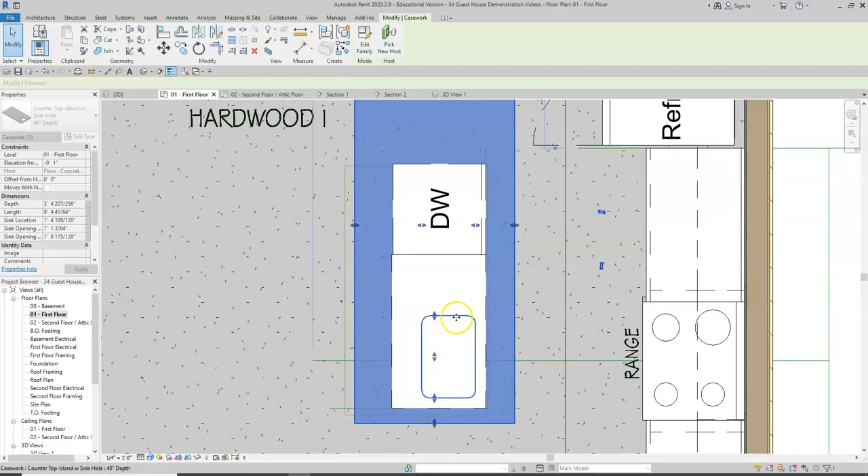Before we can know exactly how big this opening needs to be, we need to add the sink on top of the countertop. So we will locate a new component, and the sink is located here, and we have a double and a single. For the size of this home, I chose to put the single sink in.

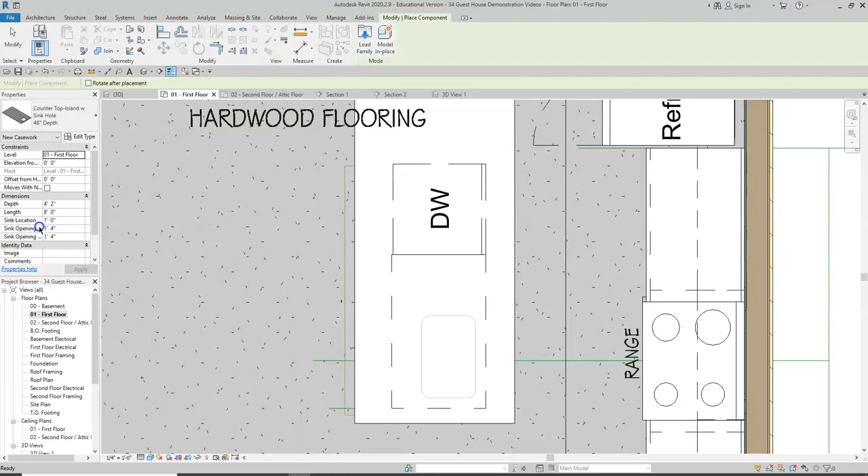We need to lock this on top of the center of the cabinet below, so we will hover around until we see that line pop up. And we will need to align the front of the sink with the dishwasher. Alright, so this is the proper location for the sink.

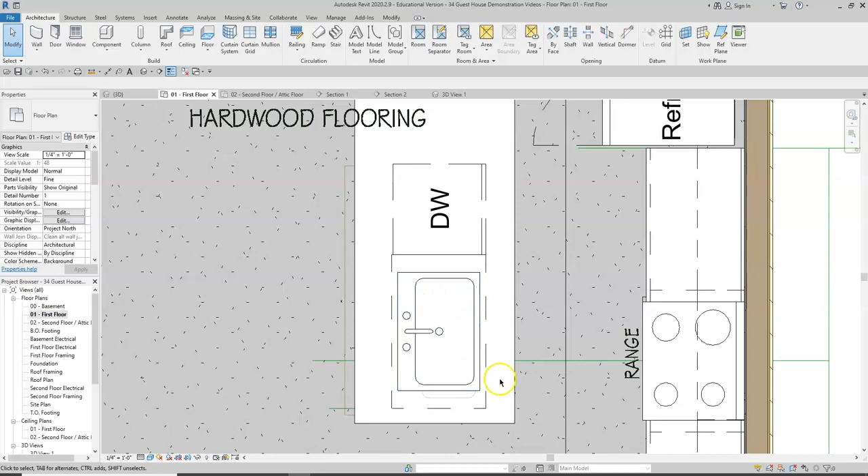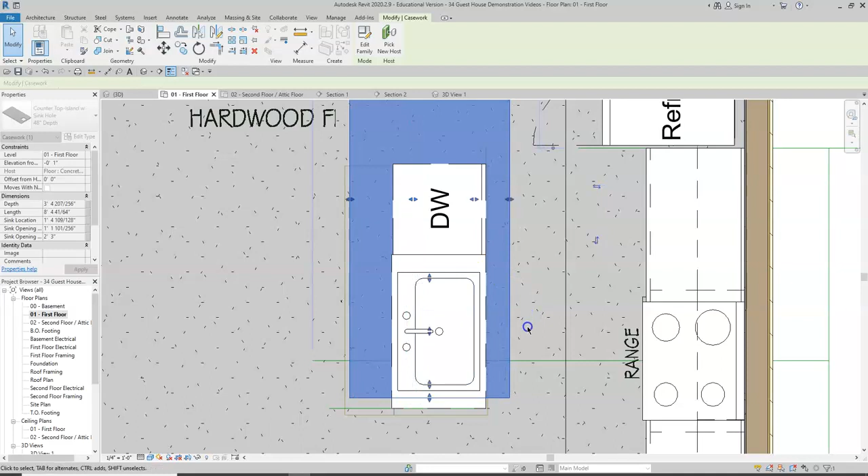And we need to align our opening with the sink itself. Once we have located the opening on all four sides, we can now manipulate the outside.

So now we are allowed to move the edge of the countertop and the front of the countertop. Had we done this in reverse, the sinkhole would be moving out of place.

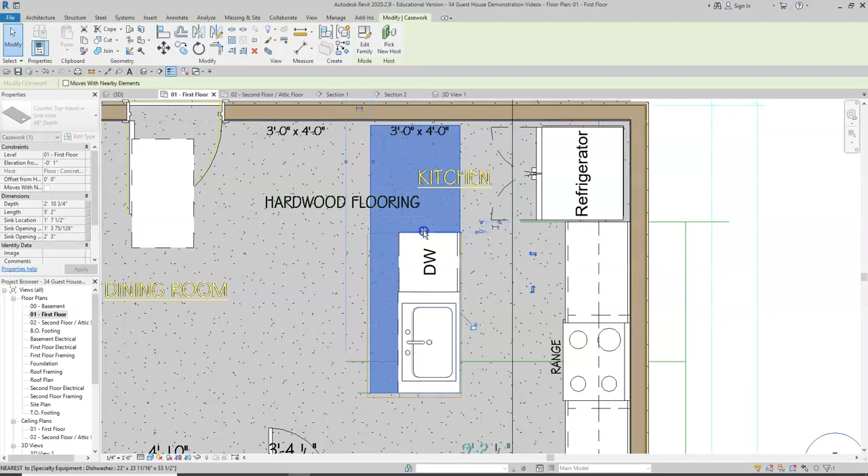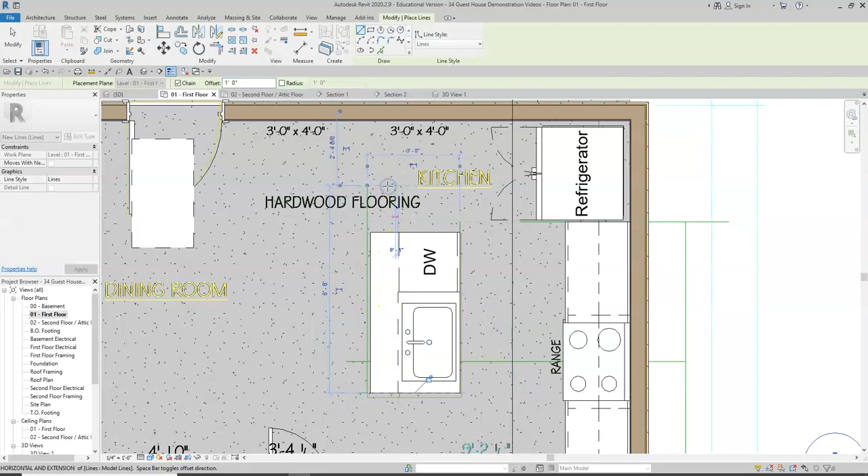Now for the overhang, which is where the bar stools would be for knee space, we will need to draw a new model line. The overhang distance is 1 foot. So we will need to find a model line, offset 1 foot, find the back of the cabinet below, and then align the countertop.

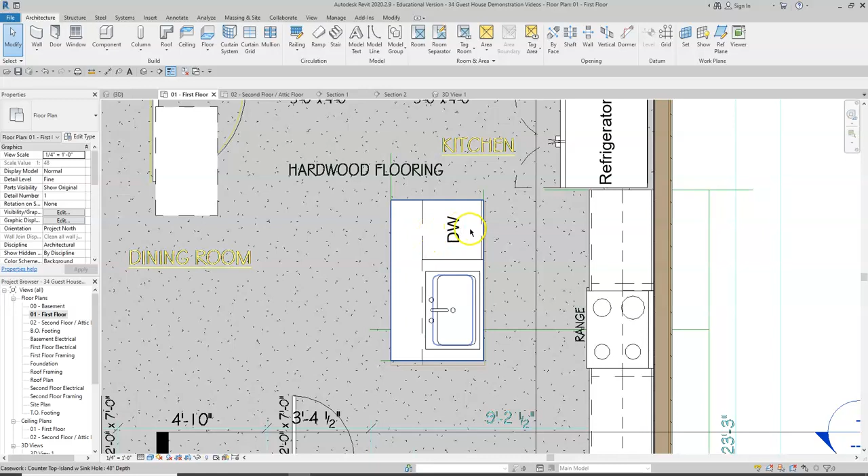So one way to cover this would be to put a stud wall here. Another way would be to put more cabinet filler in. The only issue is the cabinet filler must be hosted to a wall, and we do not have a wall here. So what we're going to do is quickly create a new wall.

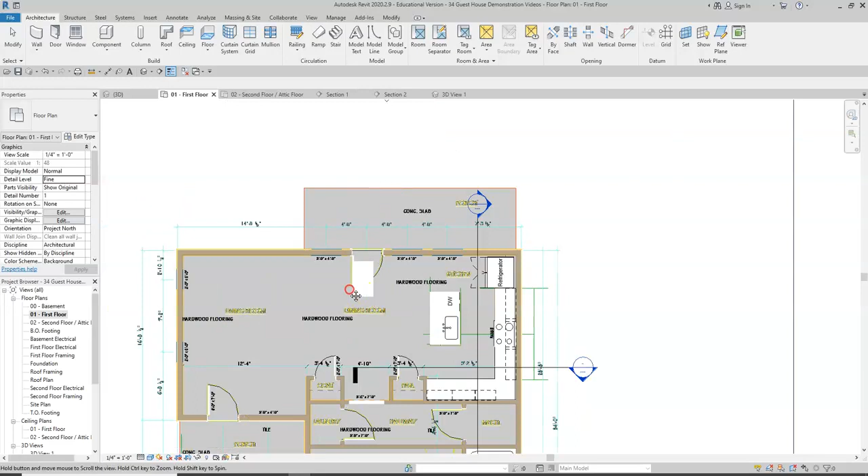I will show you how to create a new wall and have it only be 1/2 inch thick, and we will draw it around all three sides, so that our island is wrapped in the same material, which will be the same cabinet material when we assign materials in later videos.

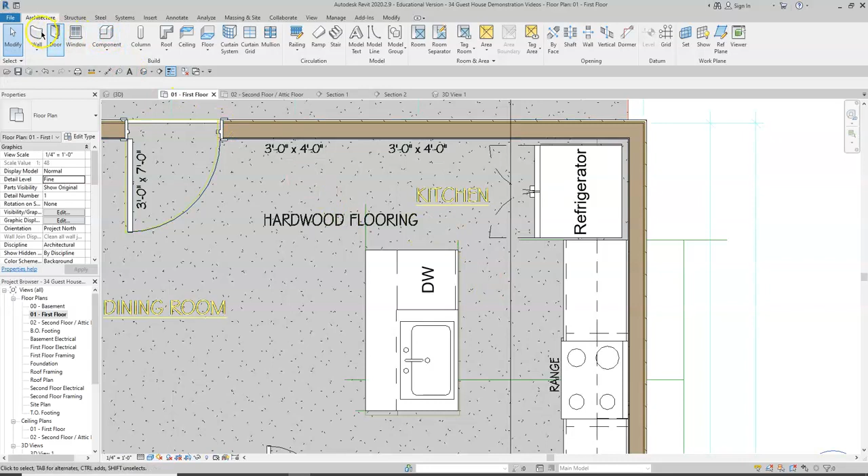Alright, so we'll click on wall, and we will start with a generic wall. We'll go 4-inch generic. And as we did for the cabinet, we are going to edit type, and we are going to duplicate. And we will name this 1/2 inch island wrap.

The structure is going to remain, the material will be unnamed at this point, and our thickness we will assign to be 1/2 of an inch. So 0 feet, 0 and 1/2 inches. Select OK, and OK once more, and now I have my 1/2 inch island wrap ready to go.

Now for the height, at this point we can just guess the height, and then we will go into our section views and exactly pin the top of the wrap to the bottom of the countertop. But for right now we're going to simply wrap the whole thing in a 4-foot tall material. So we're going to go unconnected on the top constraint, since we're not going all the way to the second floor, and we will add the height to be 4 feet unconnected.

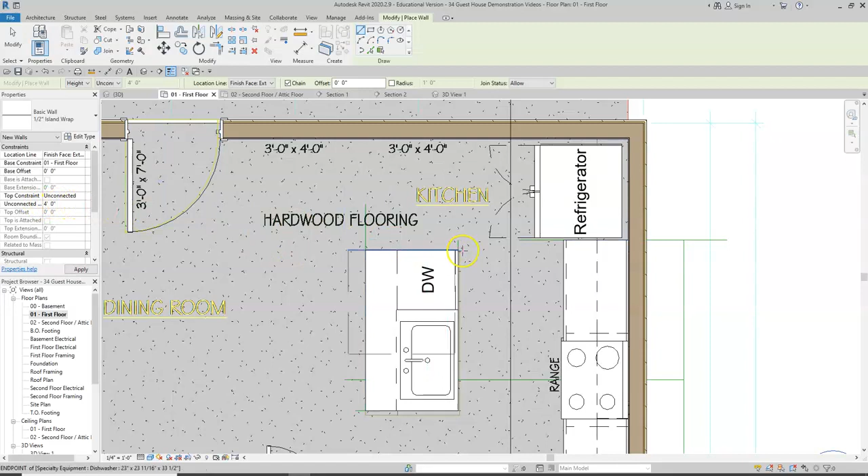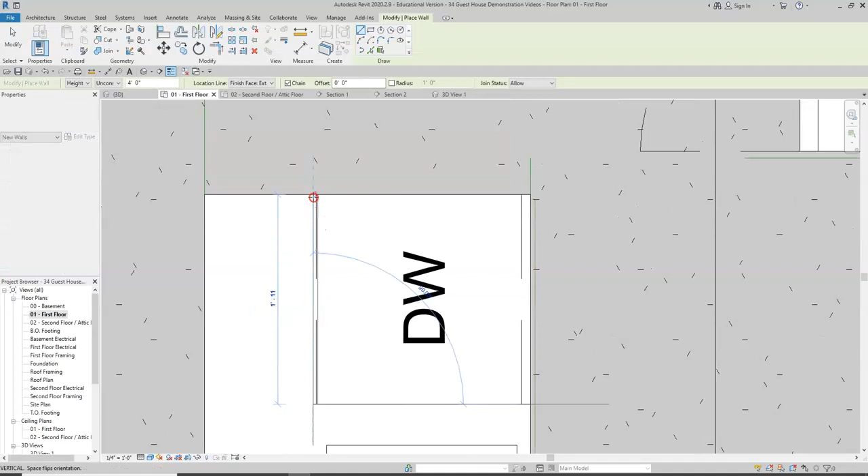Alright, we will draw from the finished face as we were given, and we are going to wrap. Actually, let's start on this side. We are going to just wrap the dishwasher because we have the cabinet exposed on the other side and it has a finished material on it, so we will simply wrap the dishwasher.

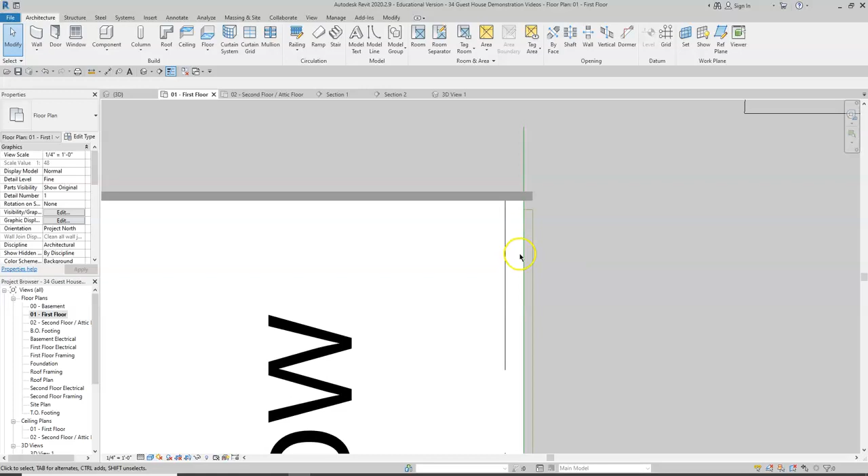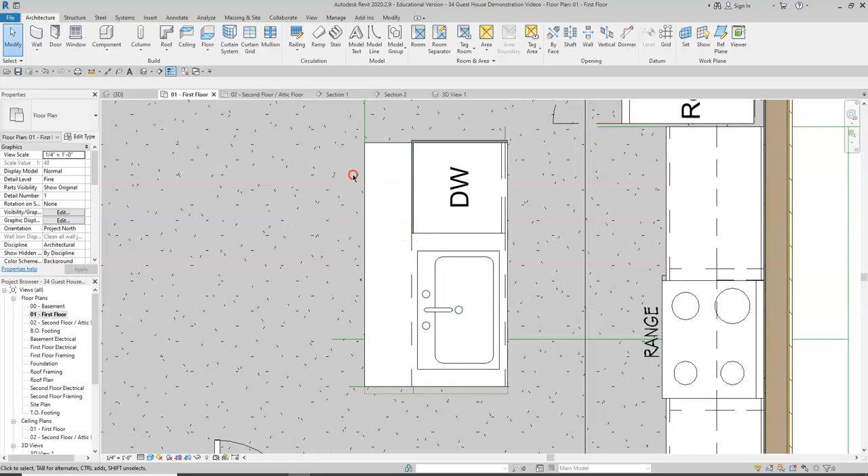We can go a little bit over because our countertop should hang over about 1/2 inch. In the future we will assign, let me realign this to the edge. We will assign the same material for this wrap as the countertop, so it will match. Let's go to our, let me show you how to do this.

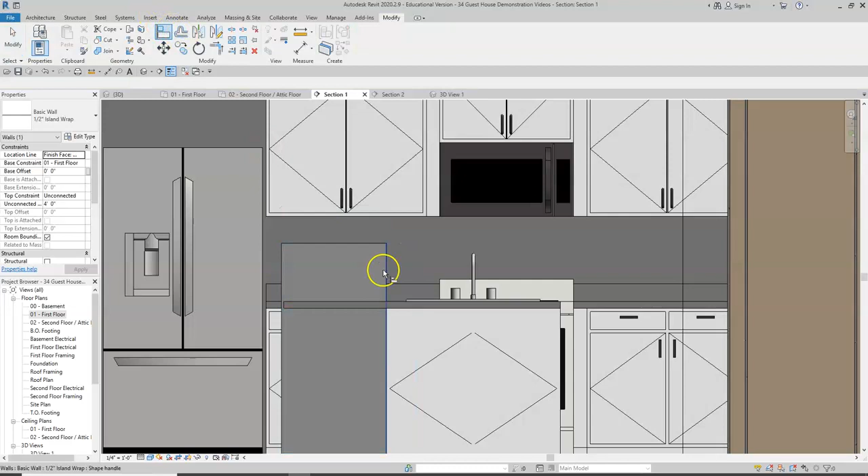We will take the section view, simply slide it around, and now when we cut our section view we will see the island in the foreground. Here's our island wrap wall, and with the align tool we will align the bottom of the countertop to the top of the wall. We can do the same thing once more.

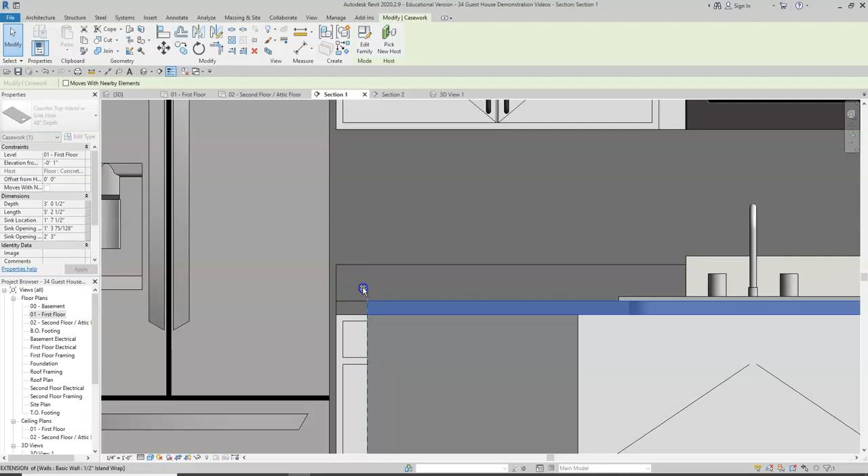As I said earlier, our countertop needs to expand just a little, with a little bit of an overhang. That can just be something that looks similar to this. Doesn't have to be exact. Should it be exact, it will be when they build. But we can just give it a little bit of an overhang. If we wanted to be precise, we could model line it in, but for demonstration, we will move on.

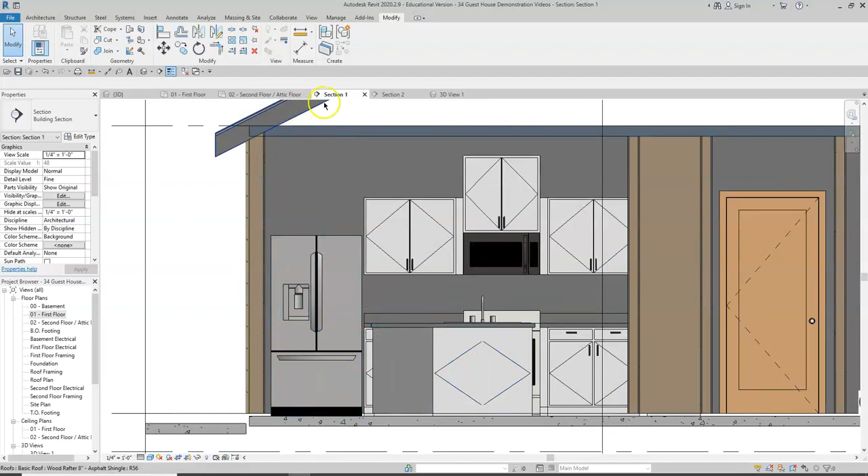We go to our 3D view that we made earlier, and we'll see that we have our island, our wrap. Let's click on the control key, select one of the panels for the wrap, then hold the control key and select the other panel. That'll allow you to select multiple things at once.

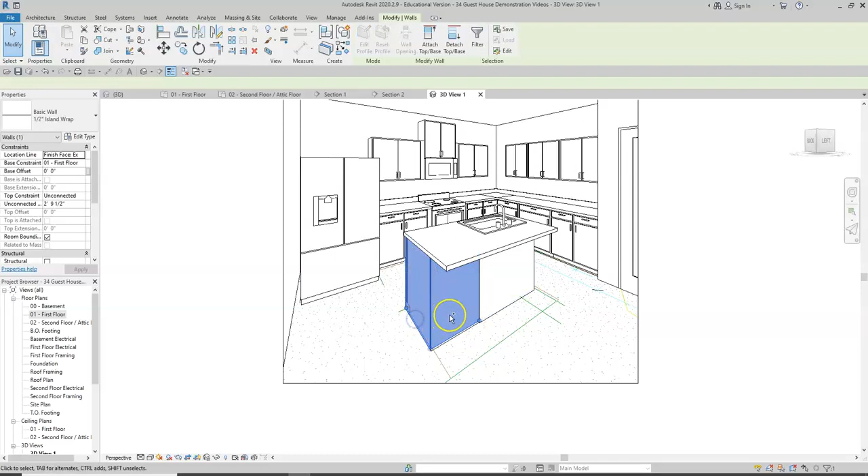Let's make the base offset -1 so that it goes all the way down to the slab. Alright, and there we are.

So we have an island countertop with a single sink. We have the base cabinets on the walls in the background, and upper cabinets on the walls in the background. We have a microwave with range hood, and a cabinet above the microwave. We have a generous size refrigerator, a dishwasher, a range, and we have completed our kitchen.

We will circle back again and assign materials to the kitchen—colors, backsplash on the wall, flooring in the room. But for right now, we have put in the base materials for our kitchen. So we will move on to the next video where we will discuss how to install windows into our home.